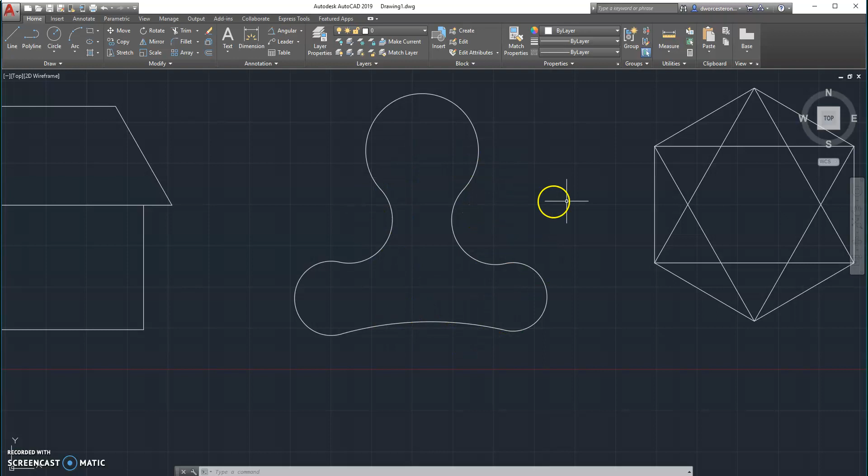Moving on across, next this shape. Again, not this perfect shape - it doesn't have to be a perfect hexagon. Just use your line command and make your shape as close as you can to that.

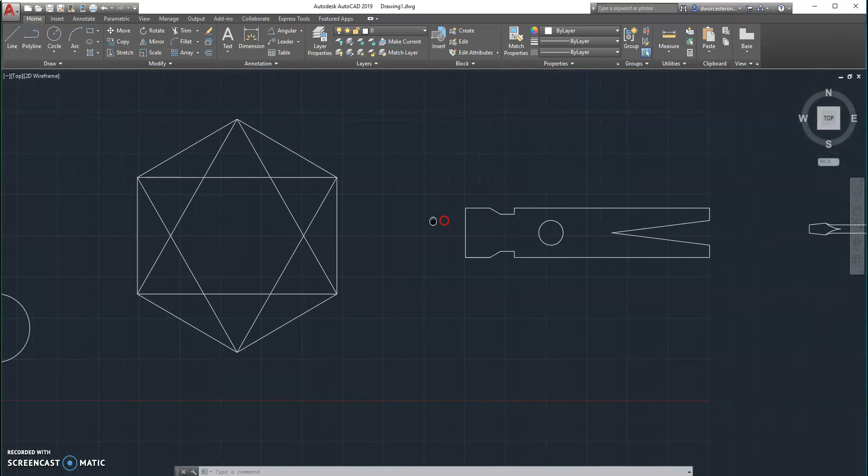Next, using the line command and the circle command, make this shape. That's the top view of a little hammerhead.

And last but not least, this one might be a little bit of a challenge, but do your best. Again, I'm not worried about anything being perfect or being symmetrical at this point, making a little screwdriver. Again, they don't have to look perfectly like this. I just have mine drawn this way so you can see.

These are little assignments from the book, and I think it's just easiest for you to see them here in the video and me to explain them as I go. All right, so there's your assignments you're going to do.

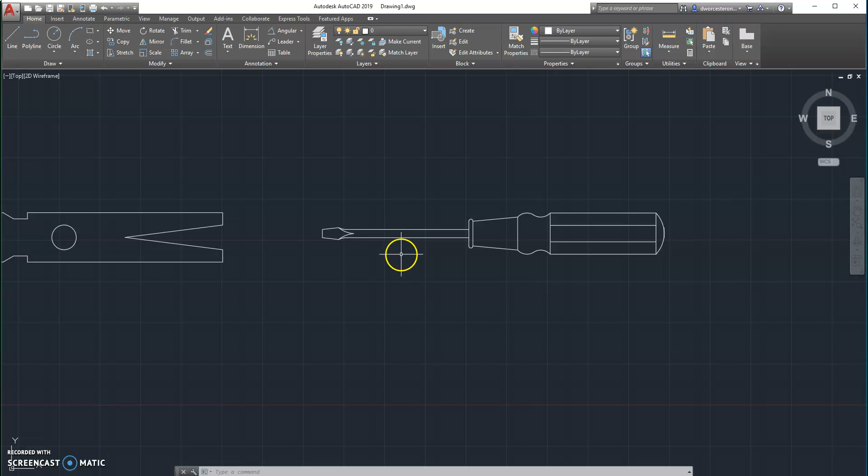Now next is going to be the upload of these. I'm going to create just one assignment with this - it's going to be lesson 2 activity. Your lesson 2 activity, I want you to include 3 different snippings.

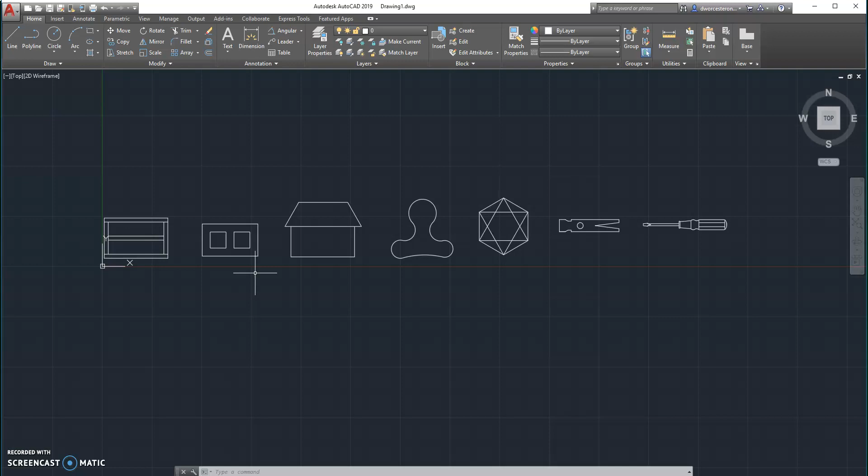So the first snipping, I want you to be zoomed in there pretty tight. I don't want you to be zoomed way out so you can select all of them when you do your snipping - otherwise it's a very fuzzy drawing when you upload it. So for the first snipping, I want you to have these 2 pictures.

So again, when I create that snipping, I'm going to go snipping tool, and go new, and put a box - oops - I'm going to put a box just around those first 2. There's my first snipping for lesson 2 activity.

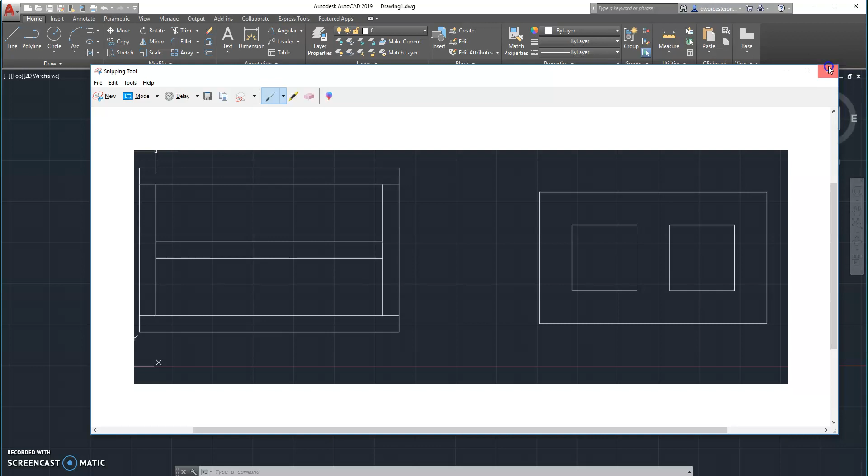Then I'll go ahead and save that, lesson 2 activity. All right, I'm going to save that. And then I'm going to repeat my snipping command.

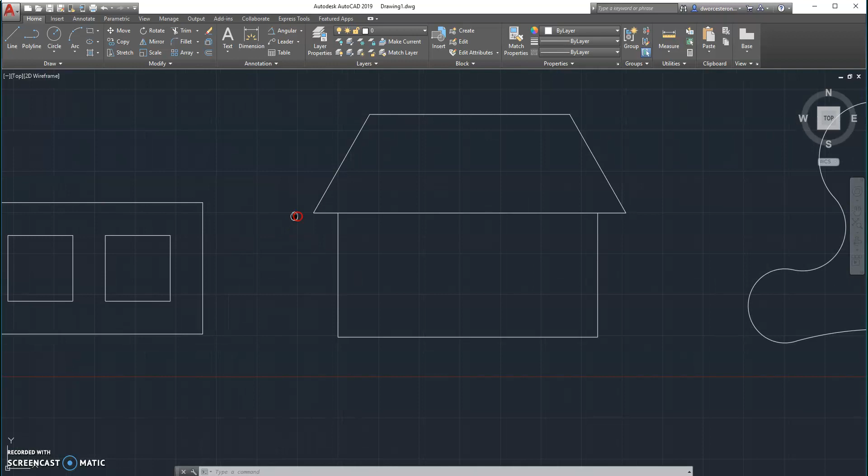This time I'm going to - oops, mine just went away - I'm going to repeat my snipping command again. Let me get zoomed there where I want it to be first. This next one I want to be around those 3 objects.

So I'm going to go snipping - oh, not in AutoCAD over here - snipping. This one I wanted around these three objects, so those three right there. And that's going to be your next new snipping.

Save as, and I'm going to name it lesson 2 activity. Oh, that first one, I should put number 1 on there, but lesson 2 activity, and it's going to be number 2 snipping. The other one's just going to be number 1. That's okay. You're going to go save.

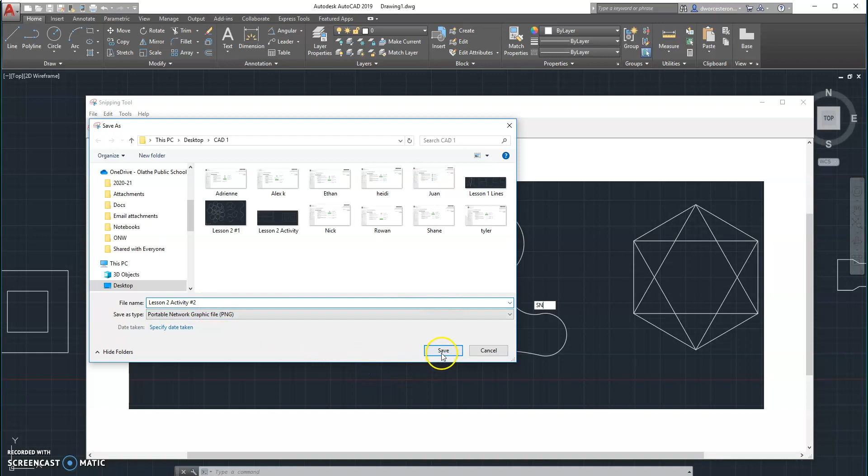And we're going to do another new snipping. I think first though, I am going to need to pan across here, and I'm going to zoom in a little bit on those two, and do another new snipping.

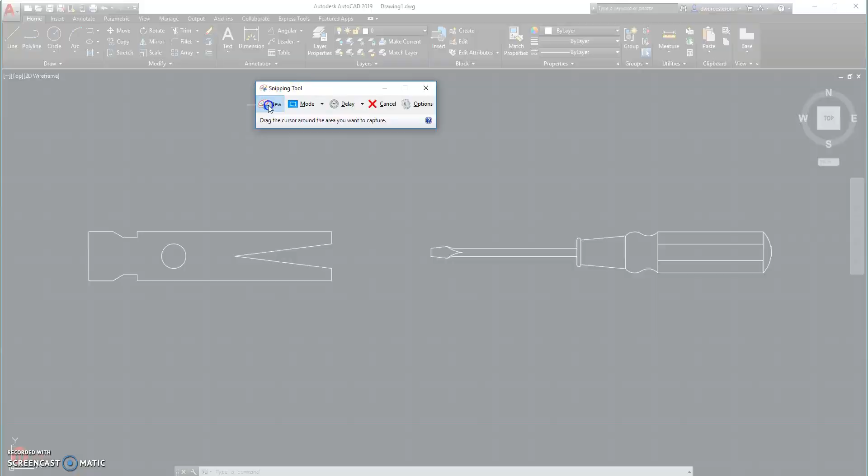And oops, this is going to be my third snipping - so 3 different snippings there. And again, obviously I'm going to call this lesson 2, and I'm just going to make this lesson 2 number 3 and save that one there.

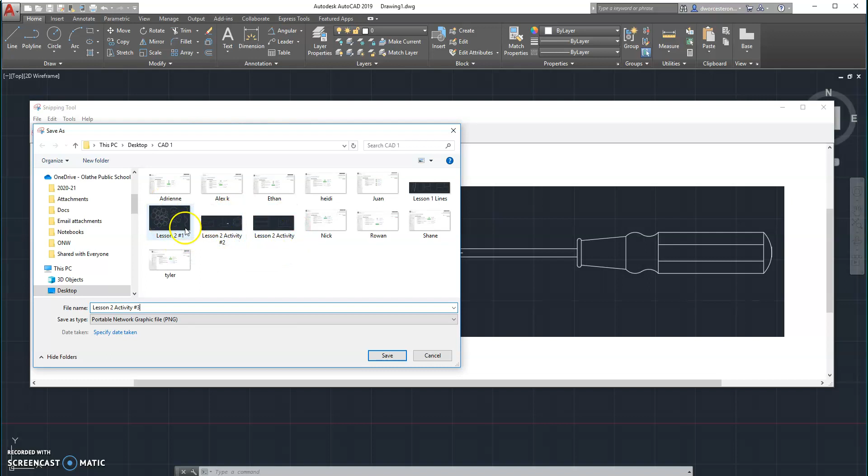So you're going to have lesson 2 activity, lesson 2 activity number 2, lesson 2 activity number 3. If you wanted to rename this one lesson 2 activity number 1, that's fine. So we should have activity number 1, activity number 2, and activity number 3. These are the activities that go with it, different than your first one that you did before. There will be a place to upload those 3 images on the student view. Good luck, and you can work on that this hour.